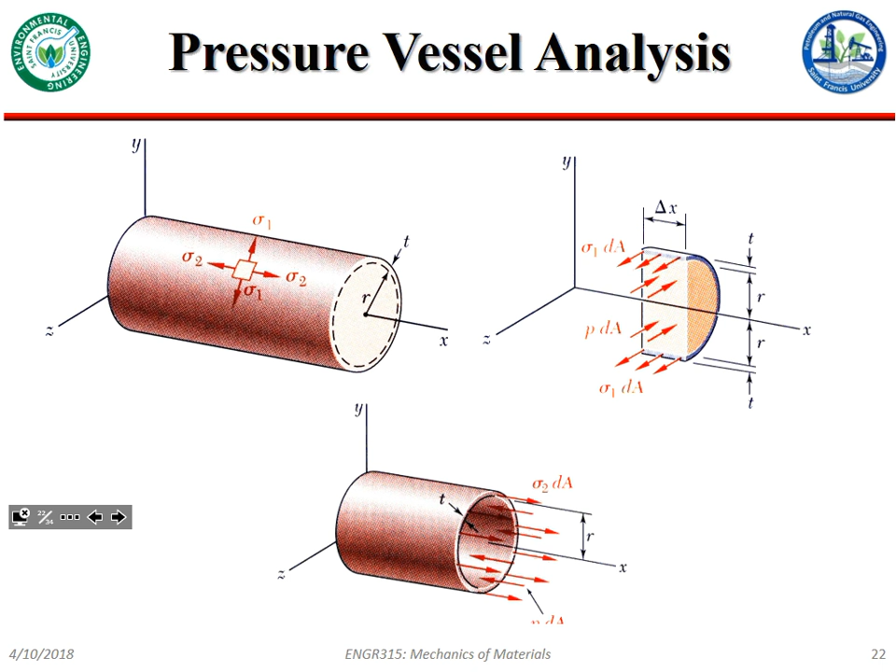And if we look at our tank, there are a couple ways you can get that normal stress. One is that if I have this tank here, it can choose to blow apart in that direction or that direction, right? So it can burst laterally or vertically, or because we're axisymmetric, you might say it bursts apart in the radial direction, okay?

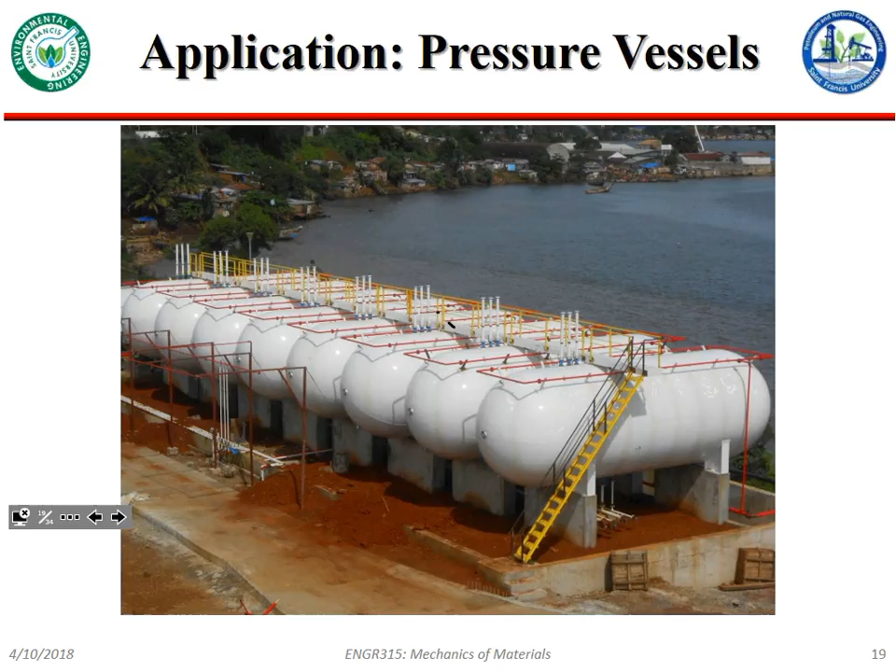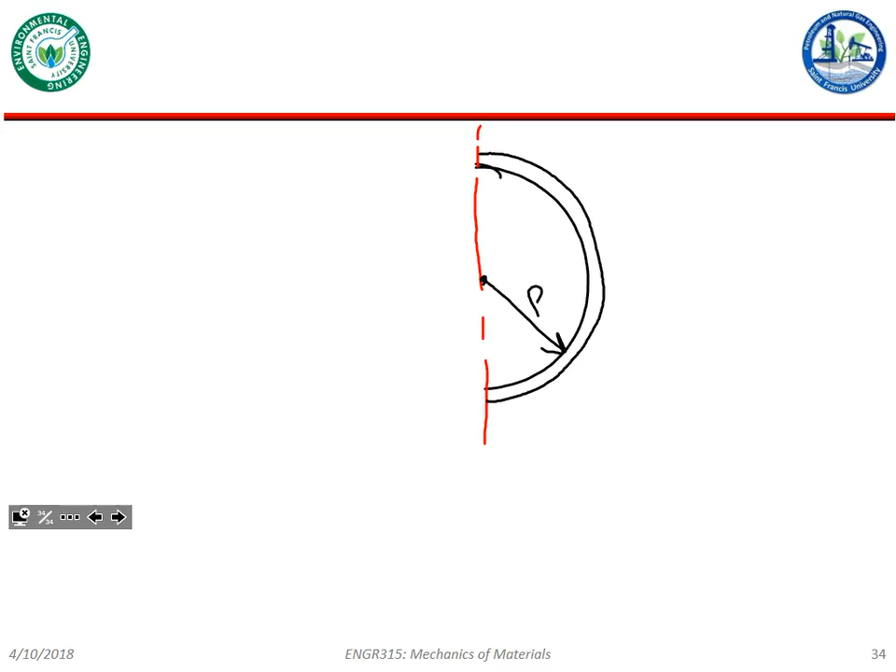And that gave us what a bunch of people call hoop stress. So if I take my tank and section it down the middle, I'm looking at a section of the tank—oops, need to draw some thickness here. Okay, so this has some radius, some thickness.

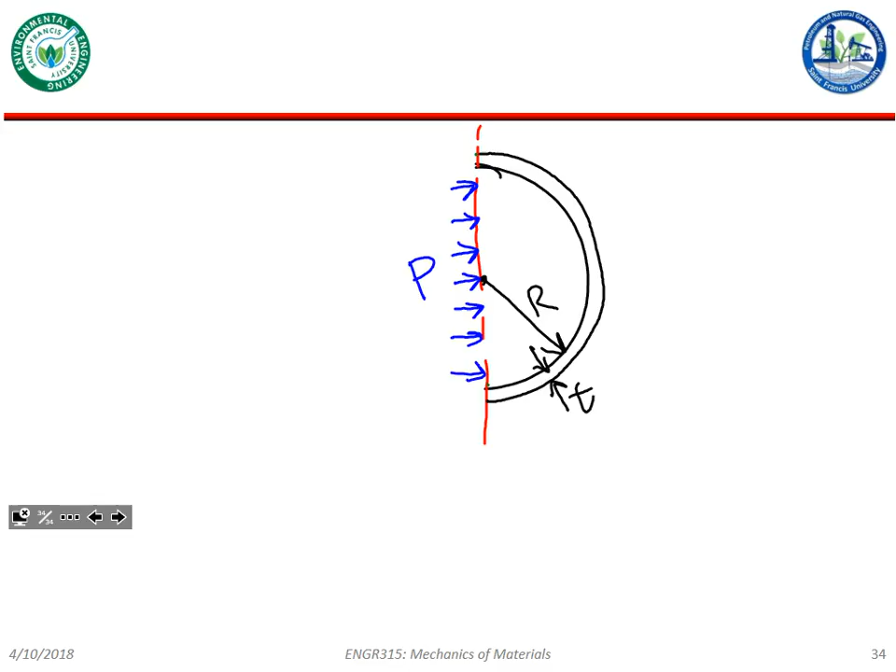And there's some gas in here, right? And this gas is pressurized, so there's some pressure distribution here, a uniform pressure distribution, because we made that assumption. And by the same token, because this is a section, we know that this material is also transmitting some force—there's some reaction force there.

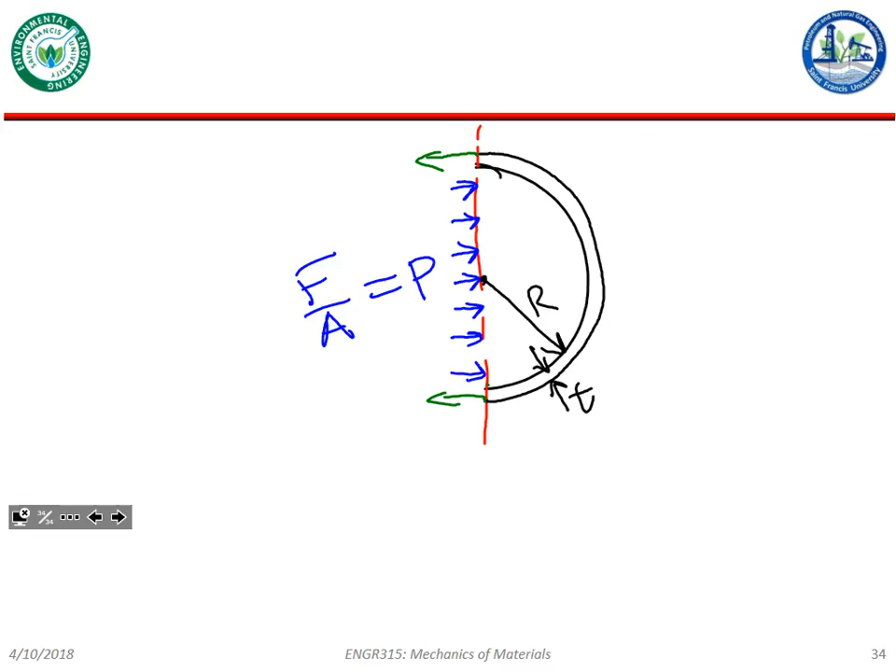So we went through the math last time and said, okay, pressure is what? Force over an area. So if pressure is force over area, that means I can get the force pushing this way by just pressure times whatever this area is. Or if I looked at this in a different view—make these colors consistent somewhat.

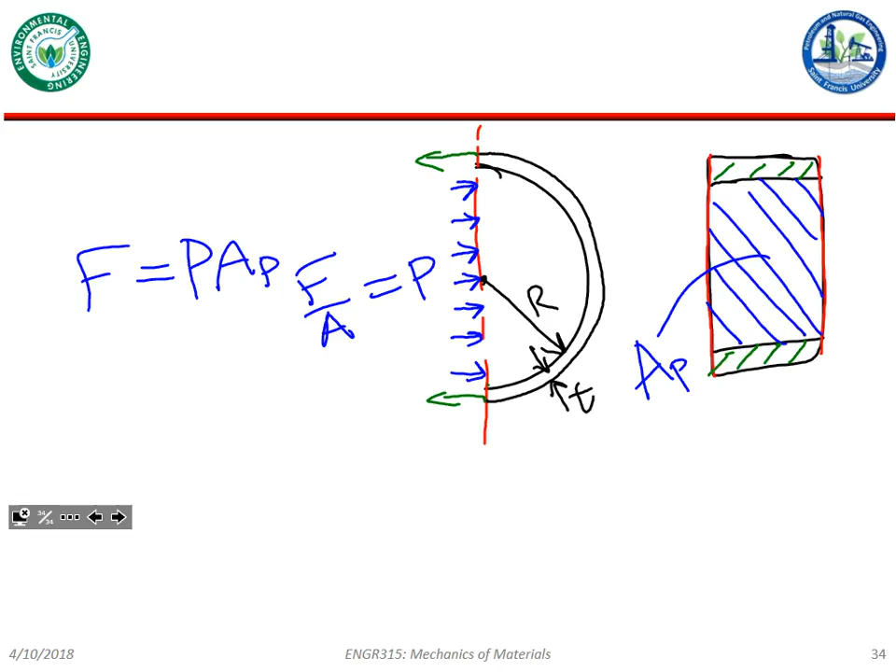This is the gas, and this is the material. That'd be the area that the pressure is acting on—call it AP. And these two combined would be like the area

that's reacting to that pressure force. So if we crunched all the numbers from that, we got something like that—that is an expression for the hoop stress.

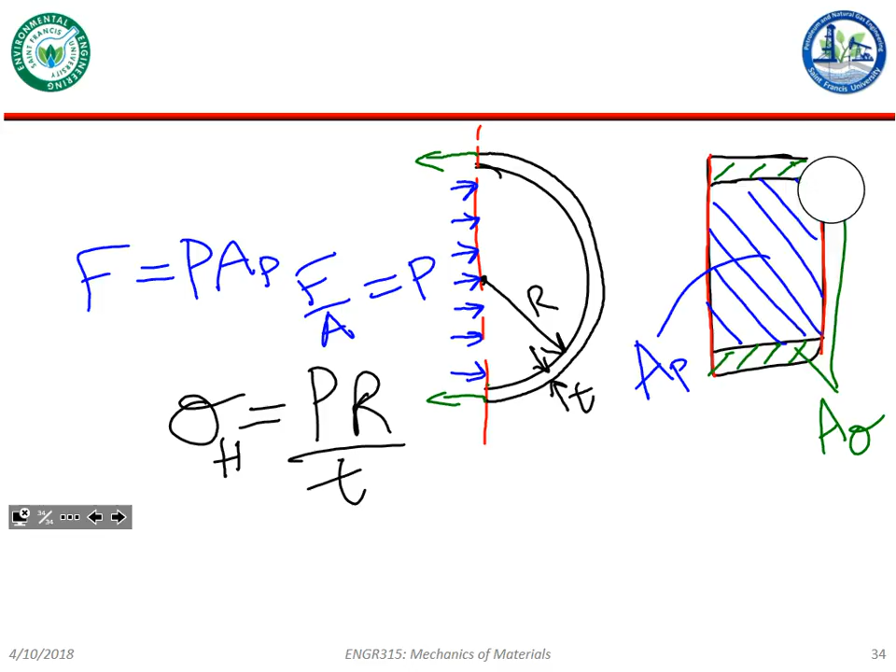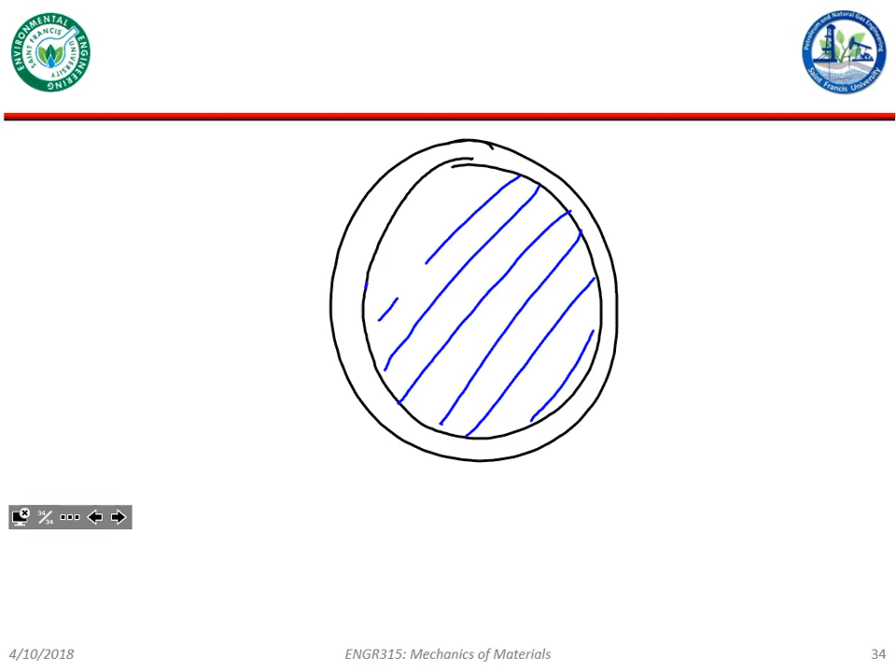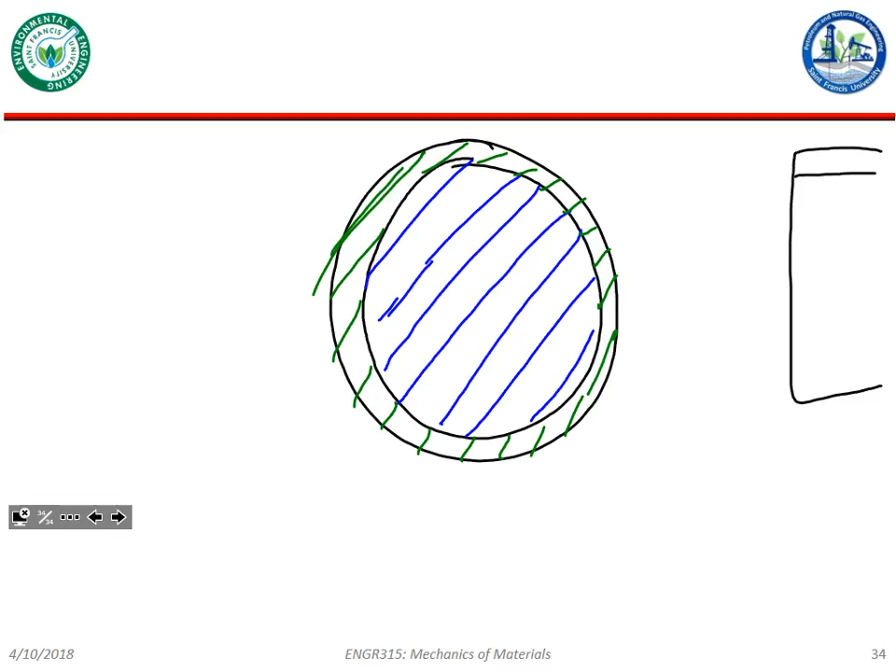So there are two ways that vessel could break. So if we work up an expression for that, we can follow the same logic. If you're looking down the barrel of the vessel, it looks something like this. That's all pressurized fluid, that's all material. Cool. Or if you look at it from the side, you have some sort of

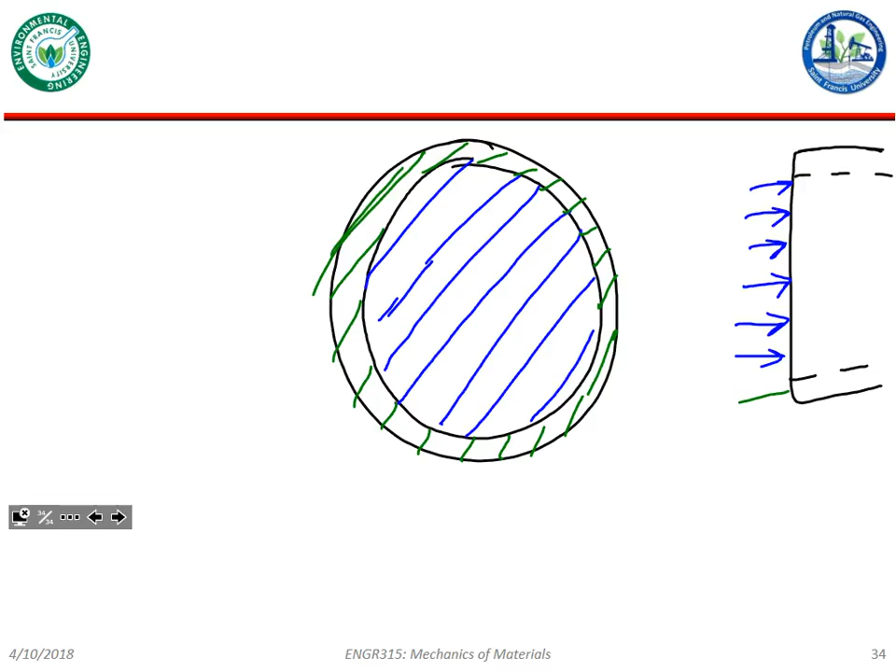uniform pressure distribution here pressing in, and then you'd have a kind of circumferential—I'm not drawing all of the arrows, because they really go all the way around. You have some ring of internal forces reacting to that, right? So I said, heck, we can do the same kind of thing—pressure is force over area. We find the area of that.

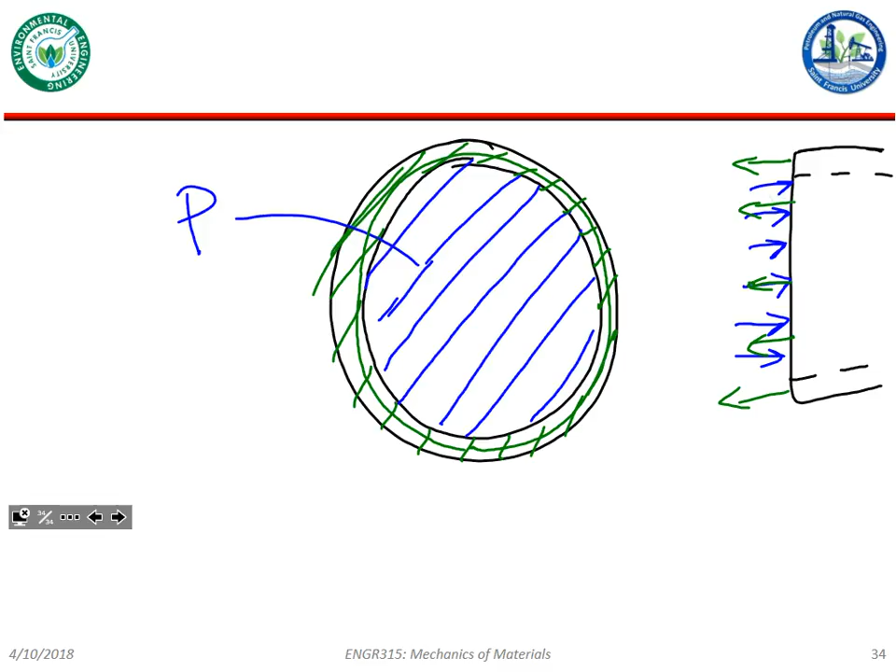Because it's a thin wall pressure vessel, we can compute the area of this outer ring in a more simplified fashion, instead of doing pi r squared of the outer radius minus pi r squared of the inner radius. Instead of that, we can say, if I draw a line around the middle of this ring,

at some distance like r plus the thickness over 2 from its center, if I kind of unwind that ring—say I have this, and I unwind it, and that line has some thickness—it's kind of like if I take that thick ring and unwind it, then it's like just a big rectangle. So it's like the thickness of that times its length, or the circumference of that circle, would be like the area of that circle.

At least it's an approximation of it. For thin wall pressure vessels it's good to within about 5% of the actual area, and it simplifies our math, so we're going to use it. So instead, the area of this is something like that.

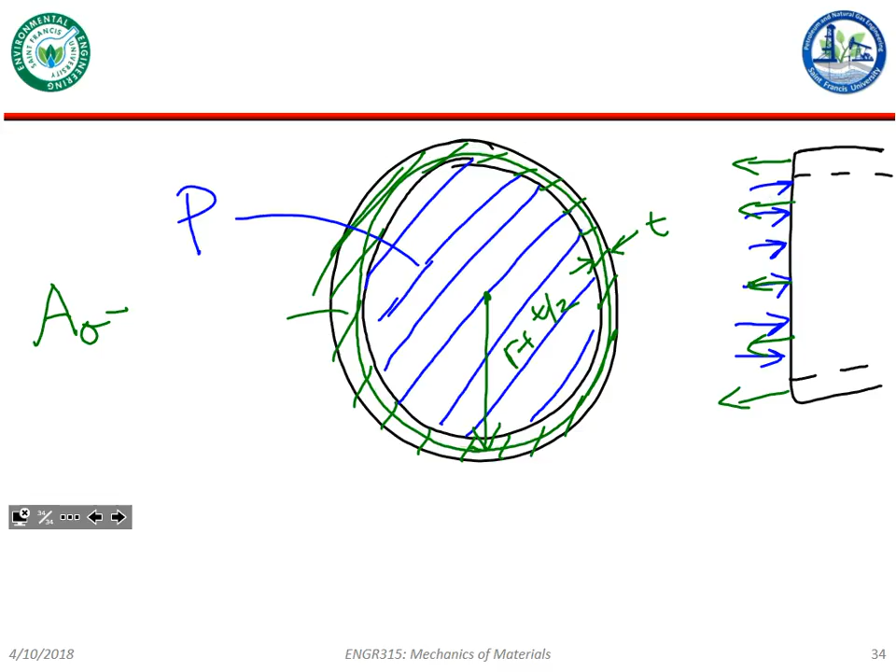And if you wanted to, you could replace r—hang on, let me get some more room. And if you wanted to, you could replace r with r plus t over 2. At least for this first option here, if you do that and crunch the numbers, you get something like that for the longitudinal stress developed in the vessel.

Yes. In the bottom one? Yes. Yeah. Note that the longitudinal stress equation is derived from the top one, although you could figure it out from the bottom one too if you wanted to. All right, so that's kind of where we left off.

So the question is, now that you know the longitudinal stress and the hoop stress at any point, we know there's no shear stress, at least on the inside of the vessel. So if I had an element right here, there's no out-of-plane stress—there's no sigma z. So how do we draw a Mohr's circle based on that and try to find a failure criterion for this vessel? That's kind of the open question.

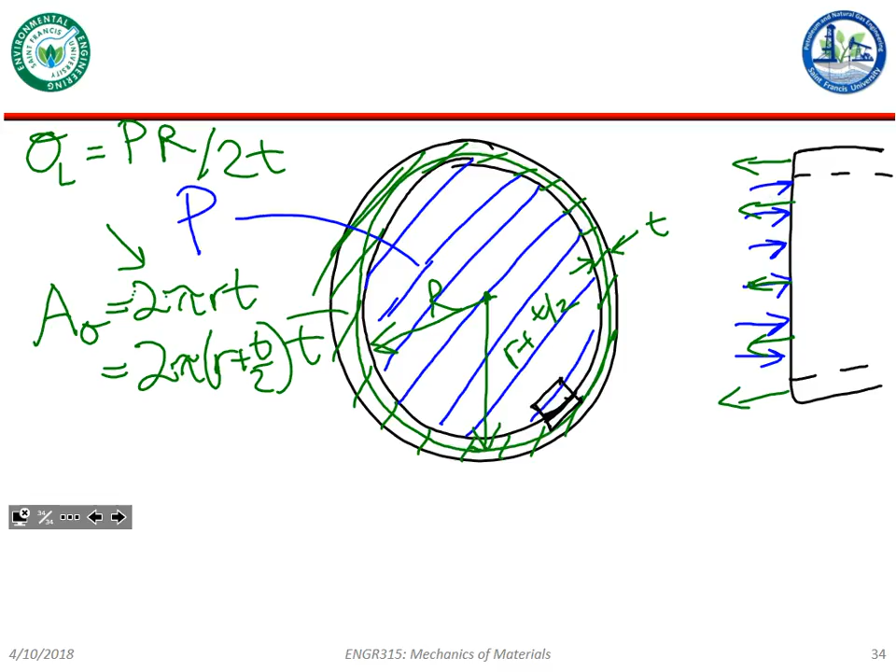So let's have a look. Okay, so do I want to go back there? Yeah, let's do that. All right, so Mohr's

circle. Each circle here corresponds to a different pair of points on the sigma axis. And what do we call those points where Mohr's circle intersects the sigma axis? Principal stresses, right? Or the normal stresses acting on a particular section where there's no shear stress.

So you can label them sigma 1, sigma 2, and sigma 3—there are 3 principal stresses, right, because you have 3 coordinate directions. And that's essentially how you build a generalized Mohr's circle: you try to identify what these 3 things are. Now, if you have all of your shear components and all of your normal stress components, that becomes really, really freaking hard.

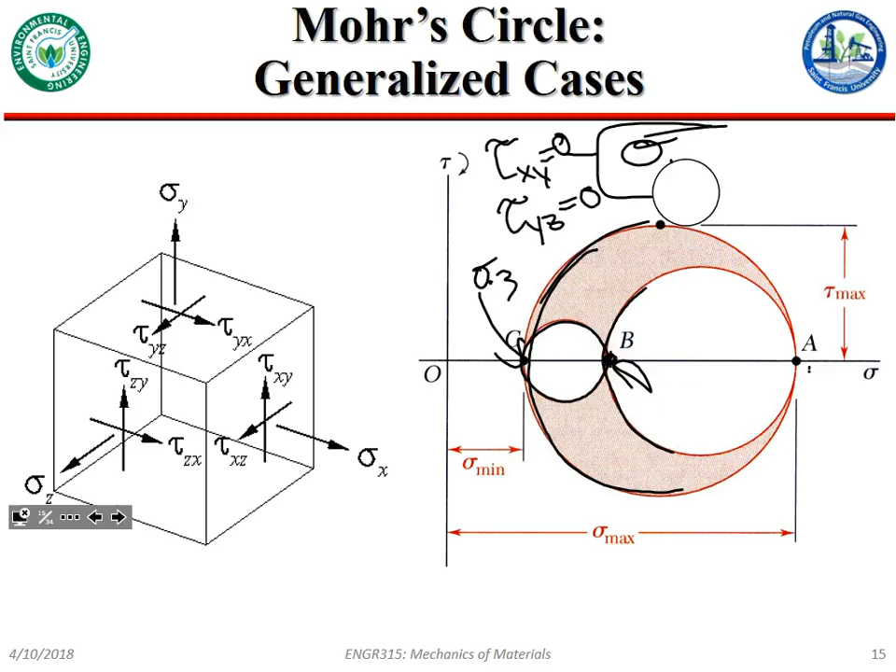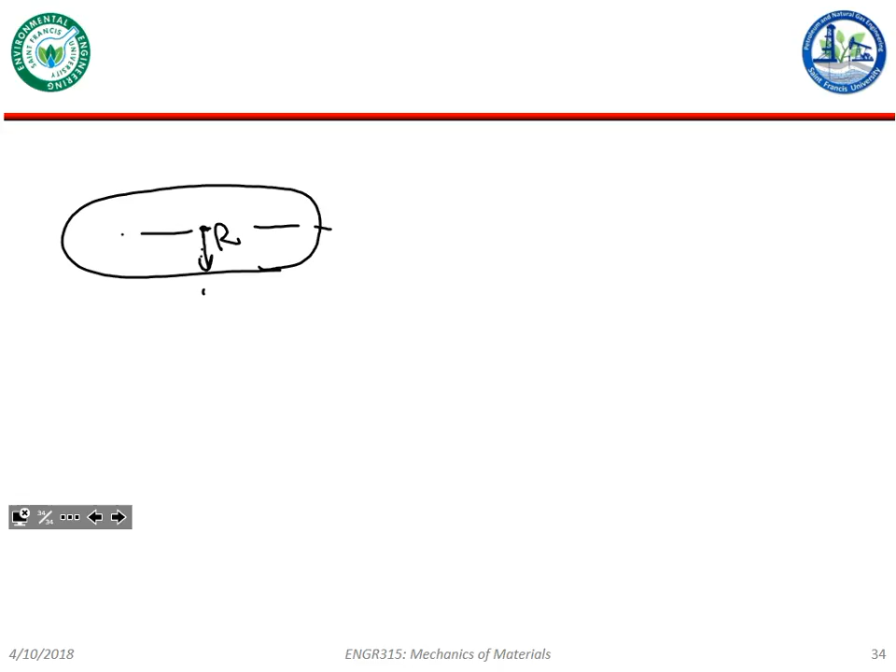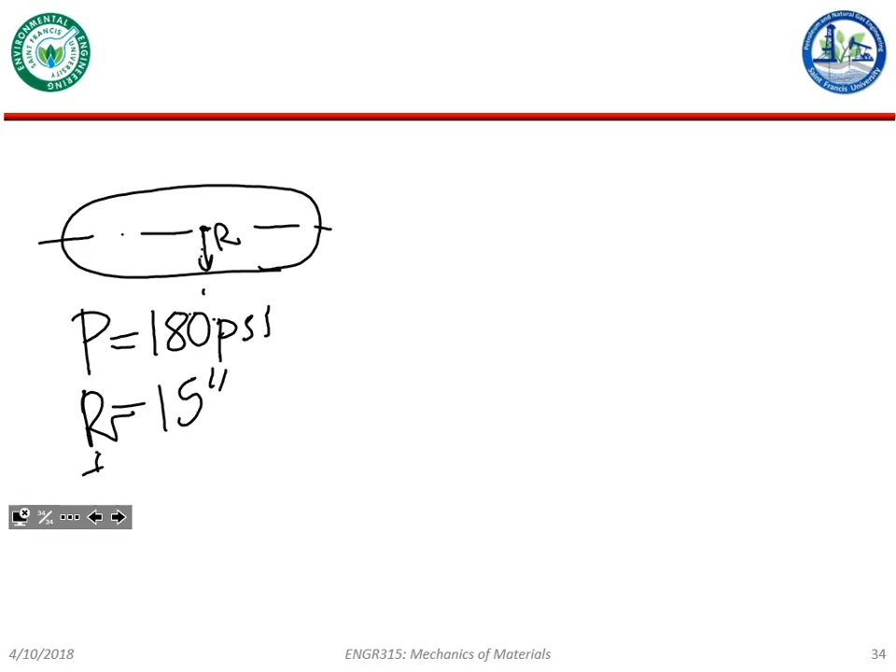So if I bop over here, let's say we have a tank, some kind, has some radius, has pressure, say 180 psi. Radius is... 15 inches. Wall thickness is 5/16 inch. Come on, work with me here, board. Thank you. Okay, wall thickness is 5/16 of an inch.

The expression for hoop stress was PR over T. And longitudinal stress was... Okay. And we're looking at the inside wall. Remember I said that it's on the inside wall that sigma z is 0. So what would the radius of interest be?

Or sorry, yeah, I guess I didn't define this as well. If the radius is a radius to the outside of the vessel, you have to take off the thickness in order to get to the inner wall, right? So if this radius goes to the outside, the radius that you care about would be like r minus t, right? So just something to keep in mind.

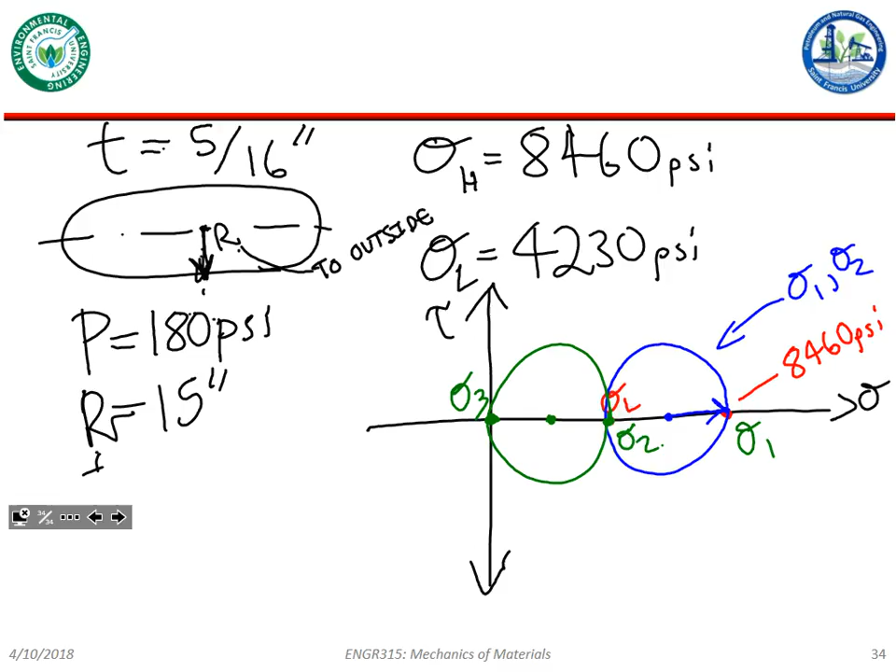Are we happy with that? I can do the same kind of geometric trick to find the radius and all that. Now how do I draw the last circle? This is the sigma 1, sigma 3 circle. It's just connecting the last 2 dots, sigma 1 and sigma 3. So I do the same tricks: average sigma 1 and sigma 3, get the center point, find the radius, draw my circle, and oh, I have a really large maximum shear stress.

And that shear stress would be what? What geometric quantity would it be equivalent to? So in this case, you're both right, because the radius should be equivalent to sigma 1 over 2, because your third principal stress is 0. In a more robust sense, it's always your radius, the radius of that third circle, which you can find by whatever geometric means floats your boat.

And that, according to the failure criterion we've been going with, gives you the maximum shear stress experienced by an element on the pressure vessel, which you can then compare to your yield stress and get whether or not the thing's going to fail. That's pretty much the generalized Mohr's circle.

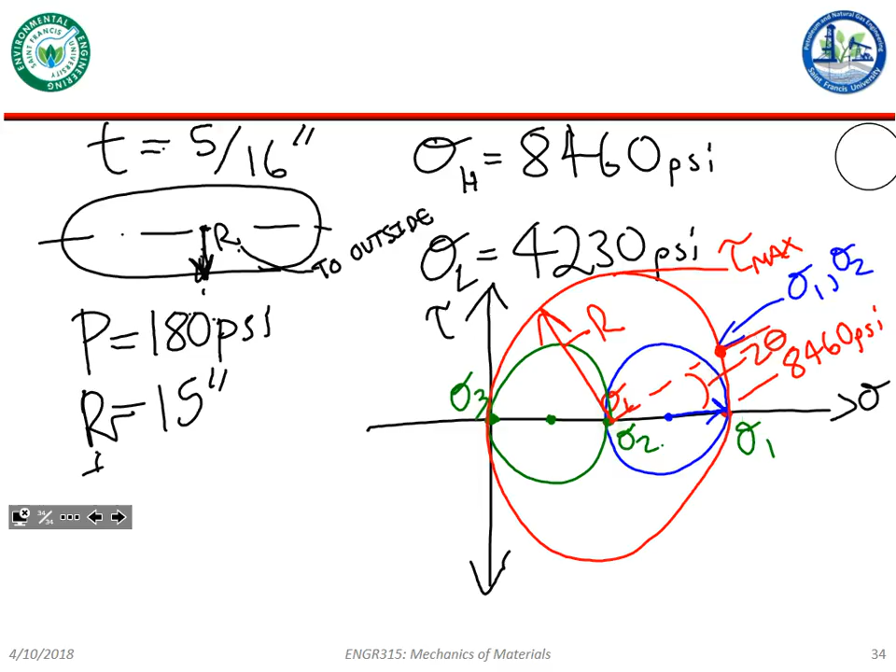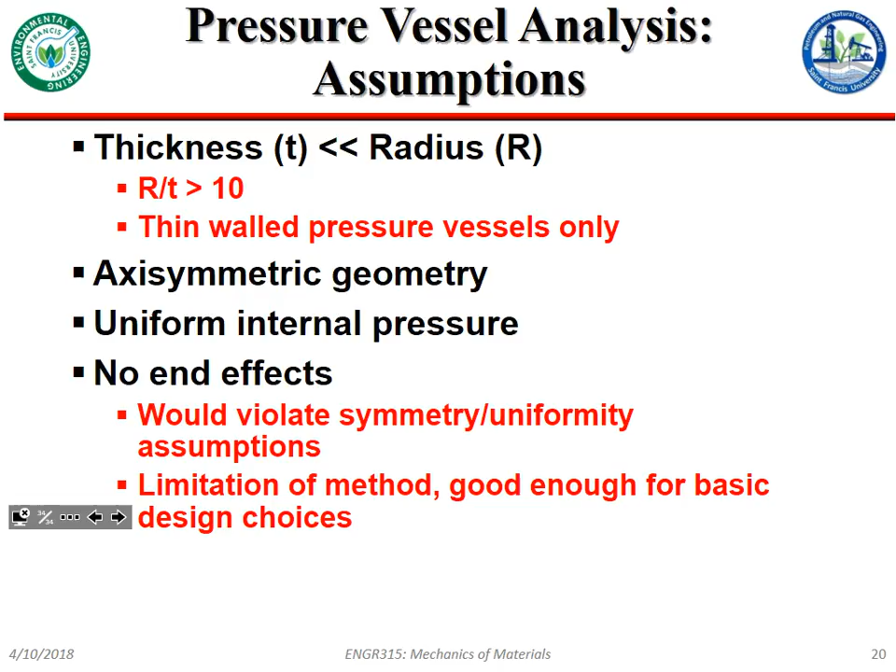All right, strains. So this is going by the same kind of idea. You have some sort of little cube, and instead of saying we have a bunch of stresses poking at it, it's straining, it's deforming in some way. We've already essentially gone through the derivations for this, because if you remember back to when we originally started talking about stress transformations, we said what if I have some element with a regular coordinate system, y and x, and some angled coordinate system that's y prime and x prime, and what's my sigma x prime, my sigma y prime, and all that. Remember all that fun stuff?

What's the relationship between stress and strain? How are they related? Linear, linearly, in the region that we care about anyhow. What is the linear factor that relates them?

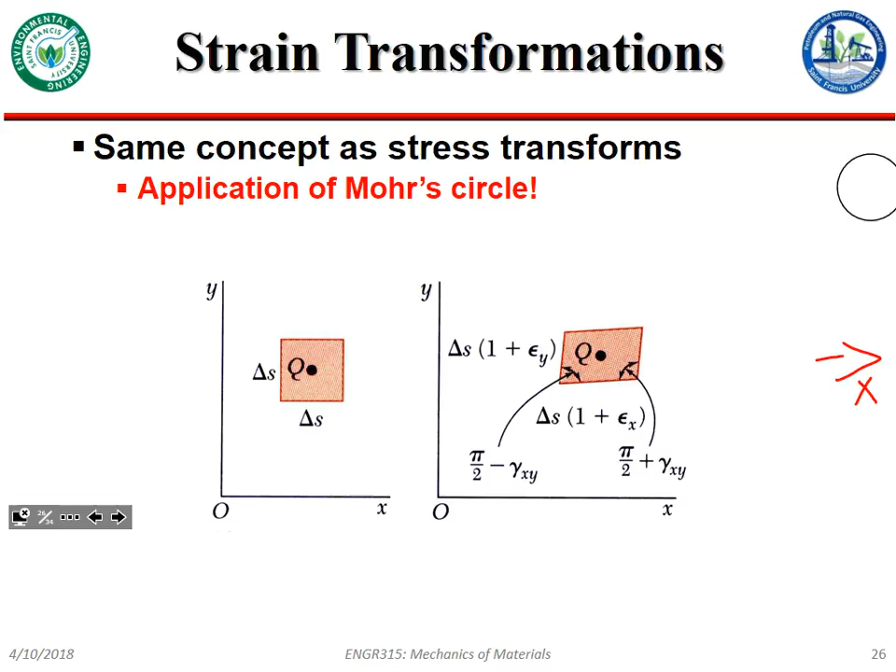Yes, some modulus of elasticity, some stiffness, be it a shear stiffness or a longitudinal stiffness, some Young's modulus or some shear modulus. So really, we can think about stress and strain in the same kind of way, because if I just did some substitutions, epsilon x prime times the elastic modulus is the same thing, more or less. So instead of boring you with another derivation, it suffices to say it's more or less the same.

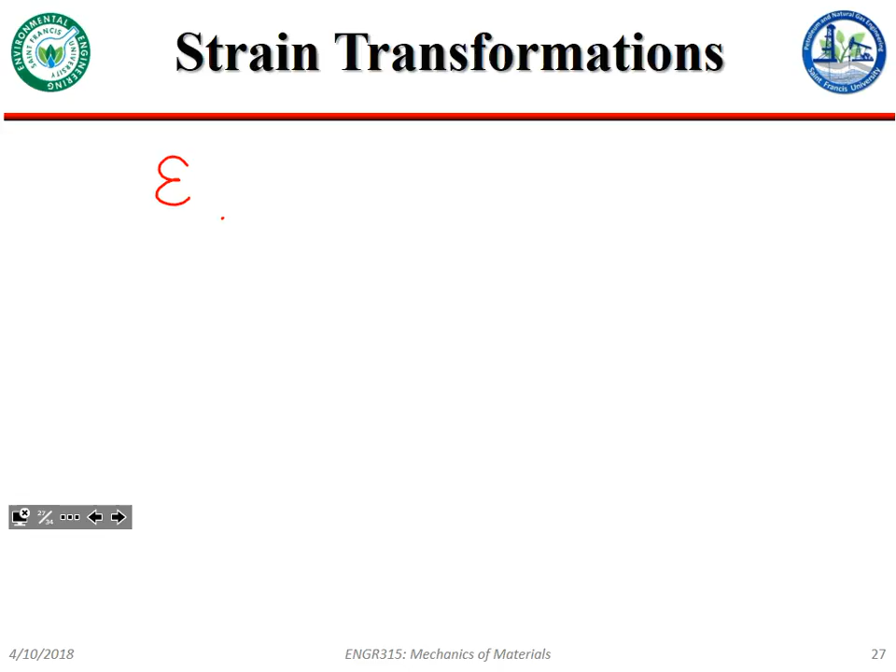Okay, and you get something that looks like this.

And similarly in the y and gamma xy directions. But just to explain what I got here, this would be like your longitudinal strain, your lateral strain, epsilon x, epsilon y, and the rotation of whatever section you're on. So we see our two thetas coming back, x. That's going to act the same way as our Mohr circle for stress. Our gamma xy, that's like a shear stress. And this looks pretty much identical to the stress equations that we had.

Epsilon x prime - so it's the normal strain in the x prime direction, same way that we had stress in the x prime direction.

And if you boil all this down, you do your trig substitutions and it boils down to the equation of a circle again. Isn't that awesome? You can use your geometry to get some of the same expressions for the average point as well as the radius.

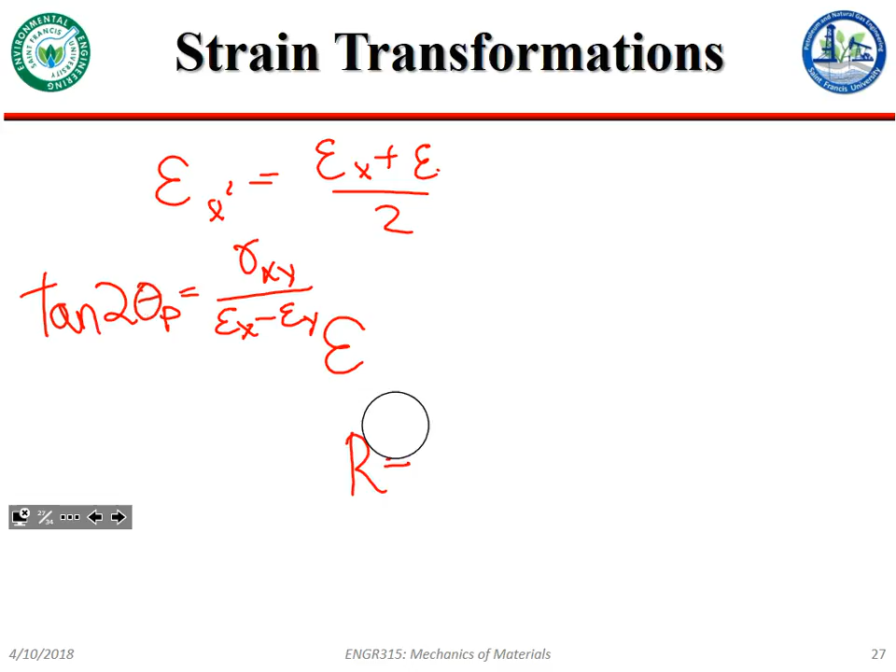Sweet, all right. So if we're in the situation I described, where we have a material whose failure criterion is built not on stress but on strain, then we can apply it in some sort of way like this. We know these equations from before - that's just Hooke's law in 2D. Again, we're assuming plane stress because I don't like to solve cubics by hand.

So based on some stresses - say you have some material, we've talked about how to find all these stresses via looking at bending stress, torsion, normal stress caused by axial loads, shear stress caused by transverse loads. We've talked about how to find all of these things. So hint, expect all those chapters to show up whenever we start solving problems here, or if you ever want to solve problems with this.

We can find all those stresses, as well as take the material properties of whatever material we're playing around with, and plug them into these equations for plane stress and plane strain. Remember, nu is your Poisson's ratio - it should be about 0.3. It's a material property, so you can find it in the same table as you'd find the elastic moduli. Each material has its own value.

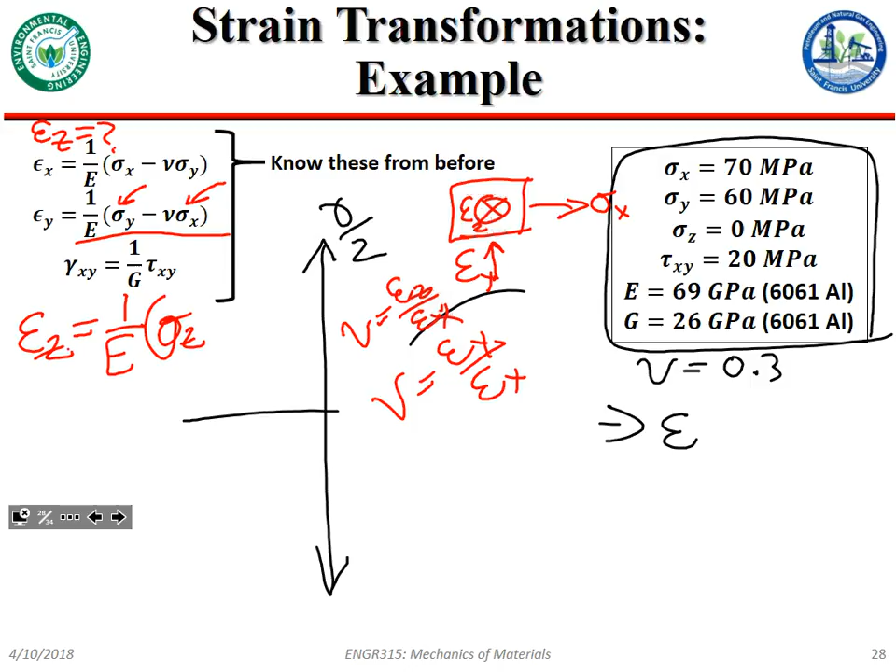So for epsilon z, in a general sense, I could write something like this. For sigma z, in a general sense, I could write something like this. But sigma z is 0, and I'm left with something like that. Oh, because I dropped it. Yeah, and that's based on all that stuff.

You could start to draw a generalized Mohr's circle because there's no shear strain in the tau xz or yz directions. All right, cool. So that's strain transformations in a nutshell.

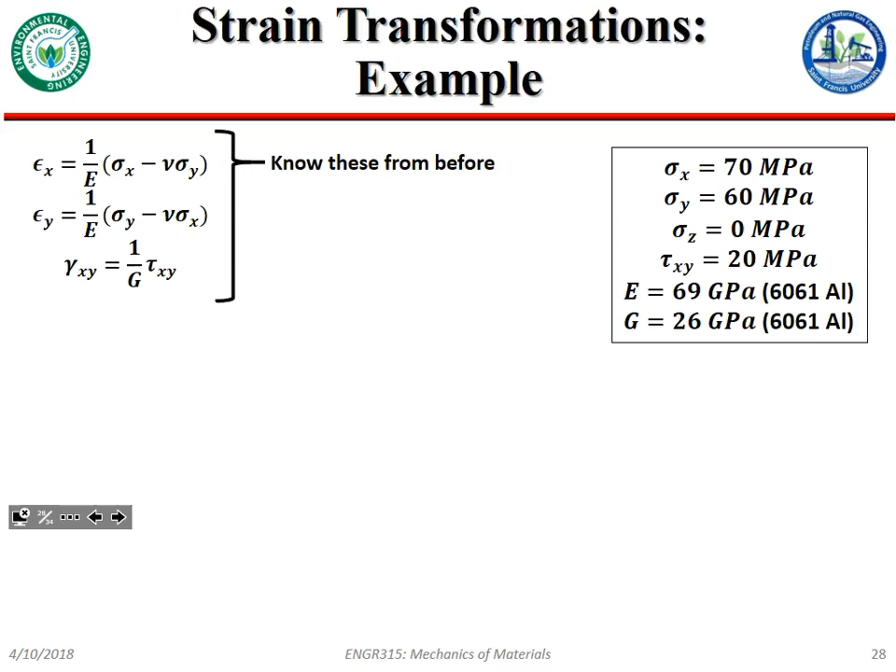And that's where I'm going to pause for today. We'll talk about strain a little bit next week and how we can measure it, because we can't really directly measure stress, but we can kind of directly measure strain. Because of that, we can parlay our way into determining the stress on an arbitrary object in real time, which is awesome for doing materials tests and stuff like that.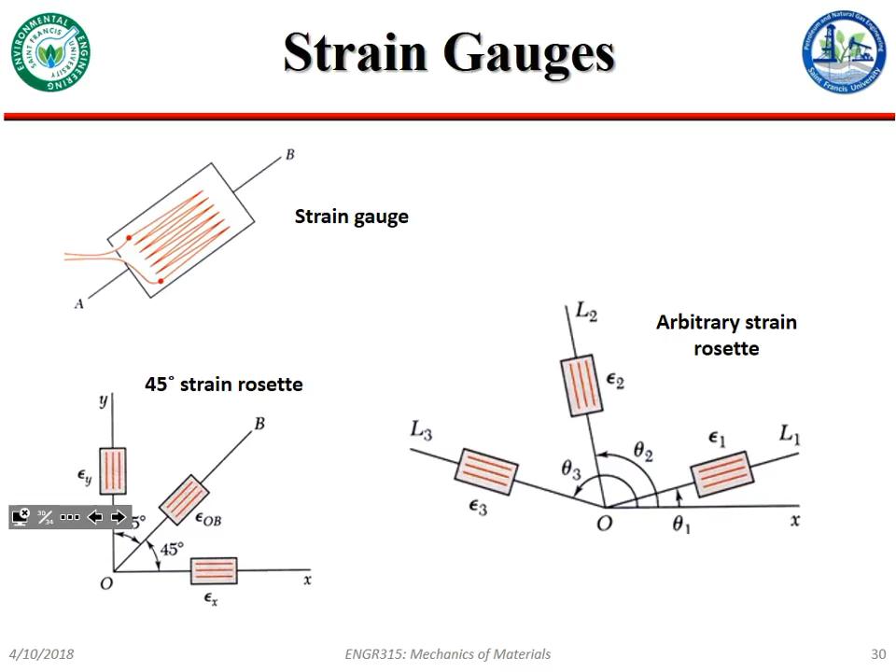But that's all I got for today. Any questions? What does gamma stand for? Gamma is shear strain. Well, it's almost the same thing, and that's the one that looks like a V on here. That and that are the same thing.